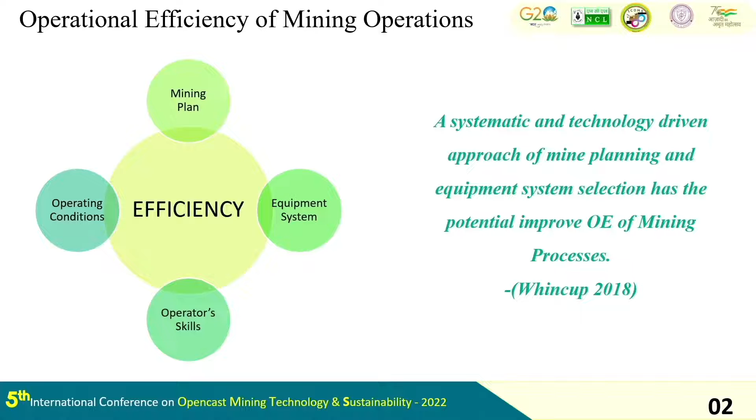So, brief introduction of the dragline mining system. Dragline mining system is also known as high bench mining because dragline operates on high thickness, like 30 meters and above, so it's known as high bench mining. And there are certain advantages because you eliminate a number of benches, your slope becomes steeper, and if your slope becomes steeper, that running slope will lead you to a lesser running stripping ratio.

Because it's coming like this slope and this slope - if you are moving this slope, you are moving more to get the same ton of coal. So, okay, and as I said, it is one of the most efficient mining systems.

Main reason is that it completely eliminates trucks. The fleet size is smaller. Production cost - CMD sir was saying - is one of the cheapest ways of moving material. Bigger capacity, minimum size is 24 cubic meters, which is also the smallest size in dragline. And high reliability, very robust machine - if the machine is okay, it hardly goes into breakdown, it just keeps running. Therefore, draglines have emerged as a dominant overburden stripping system across the globe.

So, as I said, cast blasting is integral to dragline operations. And it's not a normal cast blasting where you maximize the cast. It is a cast that we want to achieve to have maximum overall system productivity, which includes dragline excavation, dozer push, and also the cast blast profile. So profile becomes very important in this. Profile plays two important roles because it also fixes the dragline sitting position.

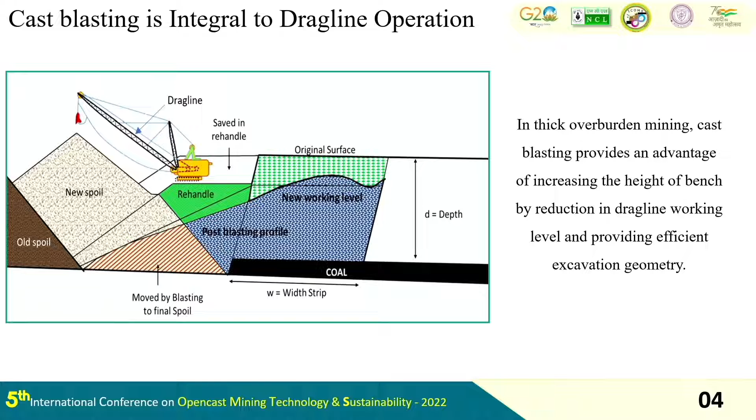Next slide, please. Next, please. So this is a case study that we did along with the Reliance team, and I'm very thankful to my co-author, Umesh Kumar Mato. He was the project director there, and also two MTech students who were doing projects at IIT ISM, Sukesh and Sai Ram Teja. Both are now working in Mahanadi Coalfield, and they were part of this whole exercise.

So just to explain, to begin with, this is the geo-mining condition of the Reliance coal. At the top you can see the dragline interburden between Turra and Purewa. That dragline was deployed, and the cover there was 60 meters thick, and the dragline size was 6120. The decision Reliance was operating on was that they were blasting a 50 meter bench at a time, and 10 meters they were pre-stripping by shovel dumper.

So on the left hand side, this is the photo, and in the middle it explains the digging sequence, the different positions the dragline takes while taking the key cut as well as the box cut to expose the coal. And the last one is just the diagrammatic representation of the dragline mining method, showing which material it takes from where, and how it extends the bench and uncovers the coal.

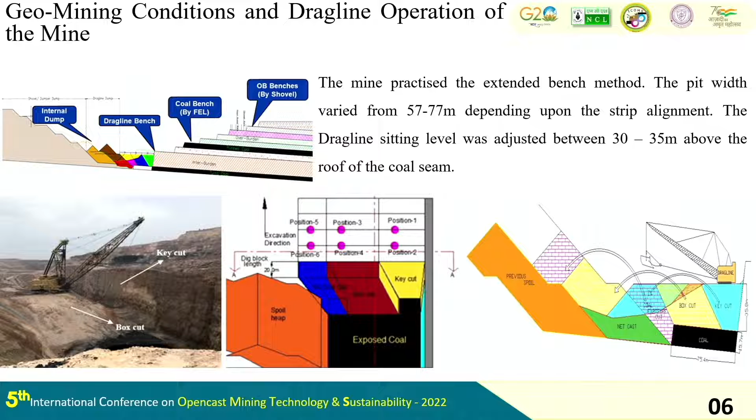Since the topic is different, I'm not going to dwell much on the dragline mining method per se, but we'll discuss more on the cast blasting. Initially we went through a number of blasts, almost around 20 to 30 blasts we studied, and these were the summary of the parameters.

If we look at the type of explosive, it was doped emulsion with 75 to 80% emulsion and 20 to 25% ANFO, and all these explosives were manufactured by themselves in their own plants. The specific gravity was 1.1 to 1.3, and the velocity of detonation was 4800.

The specific charge was varying across the 20 to 30 blasts, from 0.66 to 0.69. Burden was by and large fixed, uniform at 10 meters. Spacing to burden ratio was varying between 1.2, 1.25 to 1.35. Angle of drills, all were vertical drill holes, but these are some of the parameters which affect the performance of cast blast.

So I'm just trying to enumerate. Top stemming norm is 0.7 to 0.8 of the burden, and that's what they were filling. Decking was 2 meters at the bottom. So these are all sort of data that we collected.

Bench height 46 to 51, bench width 55 to 80, because like in the case of Amlori, yesterday I was seeing the geological map of Amlori, it has quite a swinging strike length. Same here too, it quite swings. Where it swings very steep, you tend to have your bench width less, just to manage that swing direction, strike direction. Height to width ratio was 0.7 to 0.85.

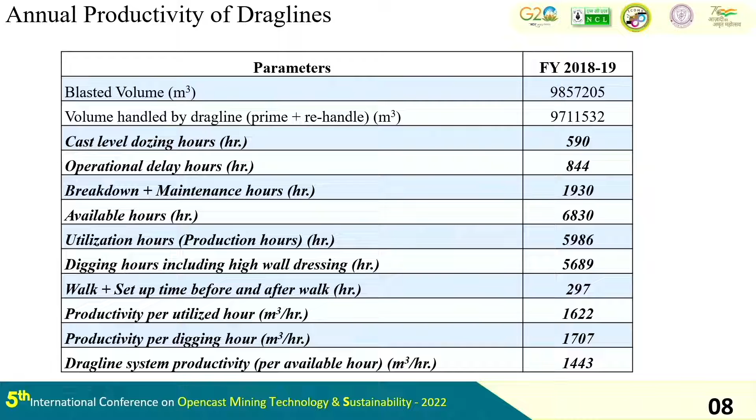Moving to the next - again the same analysis was there. The variation in cast percentage and resultant blast drop caused variation in productivity of the dragline system. When the cast percentage was very high, more than 40%, and the blast drop was in the range of 18 to 22 meters, the associated cast profile did not support efficient operation. So when the blast drop was too much, meaning the cast percentage was very high for this particular dragline, productivity was going down because the dragline was idle for many hours on account of dozing, or the dragline itself was doing unproductive work, making a pad for itself, which is unproductive work.

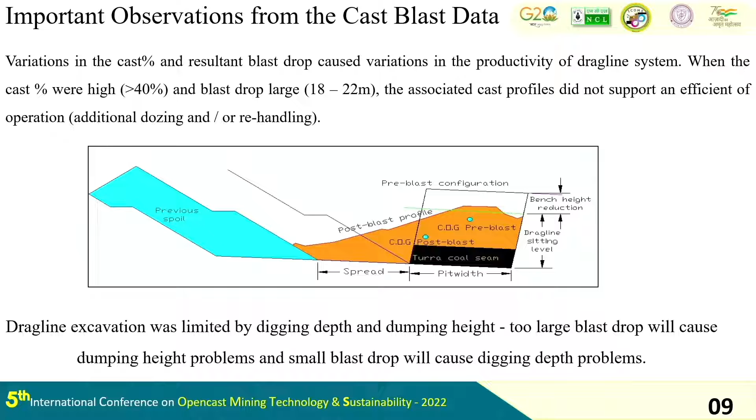So that drawing explains the blast drop and different dragline sitting levels, all that stuff. So then what we did - we used a software called DragSim to model the entire dragline operation, where we could also model the blast profile. We took a blast profile from the actual scenario and modeled that in the software. This is the sum from using the software.

While modeling we take all the parameters - geological conditions, machine parameters, production parameters like cycle time, etc. So everything we model, including the profile. Can we move to the next?

Once we modeled, then we compared. We had the actual scenario and the modeled scenario. The actual figure, for example, cast percent of that particular blast we were modeling and the dragline operation was 27.2%. The result in the simulated model came around 25.9. So there was a variation of almost close to 5%.

Likewise, rehandling was 22% in that particular operation, our model said 22.8. Productivity was 1650, our model said 1628, which is very close. We really modeled all those digging sequences and the dragline mining methods.

We also measured the average swing angle. This is a little misleading because there is nothing called the average swing angle in dragline, because every digging position is set, and in this particular case it has 6 digging positions, so every digging position has a different swing angle.

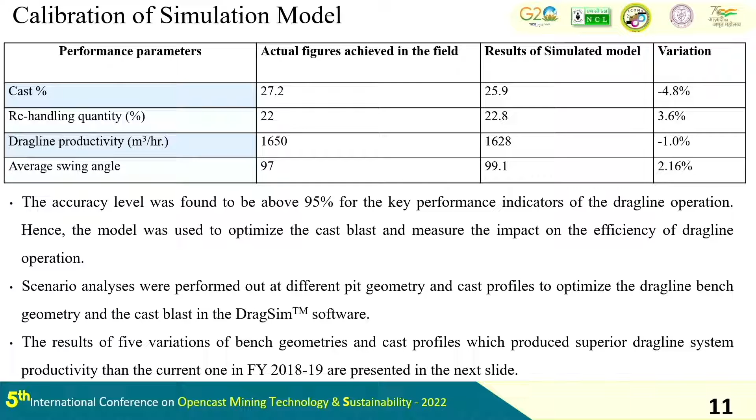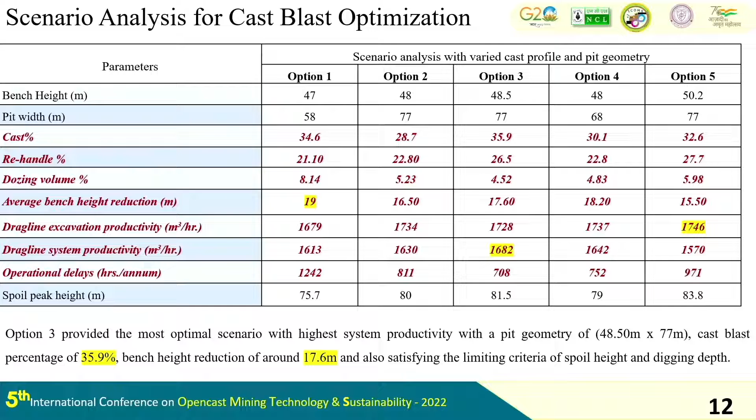While the digging productivity was not the highest, the system productivity, which included the operational delays, dozing hours, etc., during which the dragline was not able to operate or dig, was highest. So option 3, we found that in these options, that particular profile gives the maximum productivity - again, dragline excavation plus dozer plus the cast percentage.

So this is option 3. The outcome was that the optimum cast percentage we could achieve was 35.9, over which our productivity was going down, below which also productivity was going down. And the blast drop was 17.6 meters.

This, of course, is a model, not a real scenario, and mining is not a 100% business. Whatever you model, there will always be a gap. We learn from the gap, bring it back to the model, and try to refine it again, and that's how the whole process goes on, but we never achieve 100%. That's what experience says - mining has so much variation that we can never achieve 100%. Every time we try to achieve it, but there is still a gap between what we planned and what we actually achieved.

Then, with the help of the project session team, we executed that blast to achieve the blast profile, and this is the blast profile we got. This is all from the laser scanner, which we converted into an AutoCAD drawing. For the same day, we got 15.70 as the blast drop, cast percentage was 33.20, and bench height reduction was 15.70. As I said, we could not achieve what we wanted, but there was still an increment - some incremental benefit. That's what we achieved.

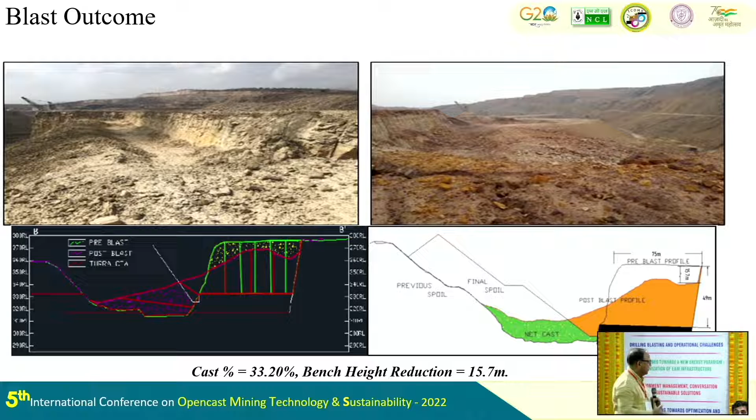We also measured the blast design. We used JK SimBlast to model the entire blast, the firing sequence, the powder factor, and the number of boreholes. We tested this for 177 milliseconds. This is the firing pattern for every 177 milliseconds - the top one is the firing pattern, and there is a powder factor which constantly decreased, while the volume was continuously increasing. That was the finding.

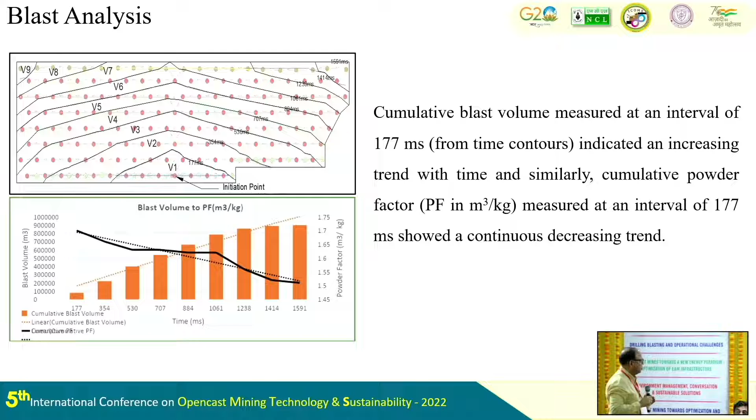So in the nutshell, we have developed a methodology, still to prove, for cast blasting. This is not for fragmentation blasting, which is practiced in most places in India - it's a typical cast blasting for dragline operations. The design objective: we need pit geometry - bench height and bench width - because cast blasting depends on the H by W ratio, L by W ratio. If height is more, gravity will support more cast, whether it's beneficial or not.

So we have to design pit geometry, cast percentage, cast profile, and finally dragline system productivity - the goal was to optimize everything. Then we undertook a simulation to achieve the desired cast percent and cast profile. Then we design the blast, for which we have 2 parameters.

One is on the left hand, an uncontrolled parameter which is site specific - rock characteristics, geology, dragline operating plan, mining method, etc., which is given. Then on the right, we have the design parameters. We can select explosive, various design parameters like burden, spacing, initiation sequence, blast hole diameter, burden stripping.

So all those where you should design, and then you test it. You run a trial blast. If you achieve the objective of maximum productivity, you go ahead and produce the report. If not, you go and change the design parameters and try to achieve that. So this is a reiterative process which has to go on until we get the desired results.

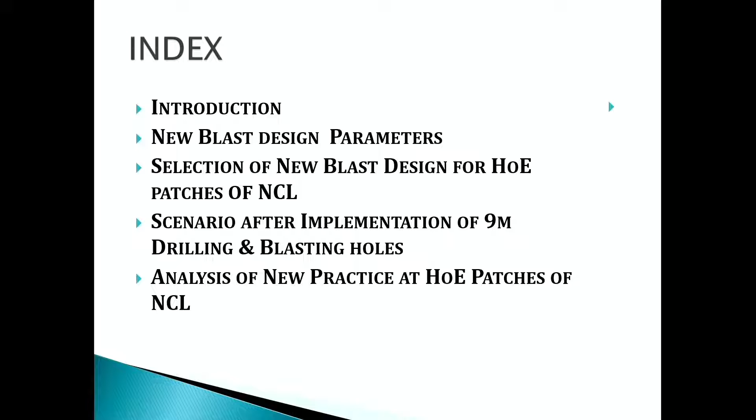Come to the first slide. This positivistic approach in drilling and blasting is basically directed by our Honorable CMD sir, and this approach is being well executed under the guidance of our GM Production, Sri L.P. Godse sir. Under this topic, what I will discuss is what blast design was being used previously in HOE patches, and what modification we have done in blast design, and what result we are getting after this change in blast design.

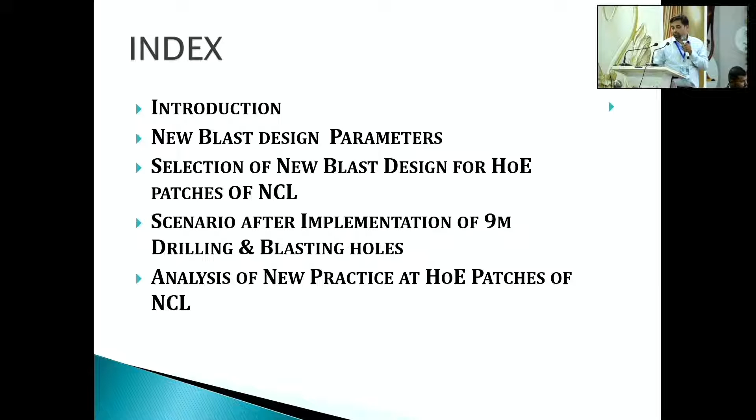First, we will discuss the prevailing practices at HOE patches. Since 2006, we are dealing with HOE, and we have 6-meter drilling, and our dia of drill in HOE patches is 159 mm, and nearly 80% of removal is being done by HOE contractors. Powder factor ranges from 1.5 to 1.9. This is all about prevailing practices.

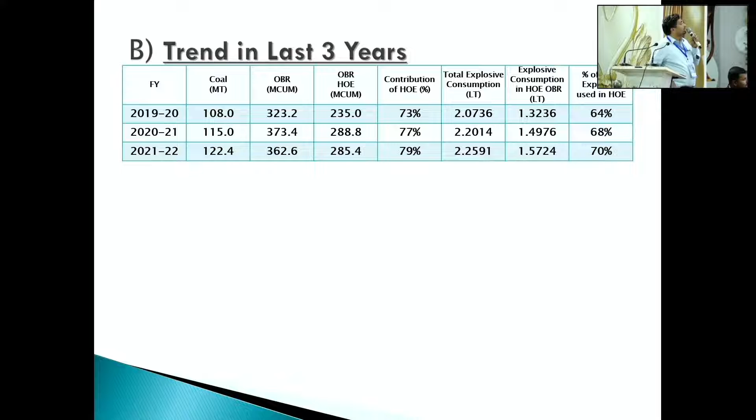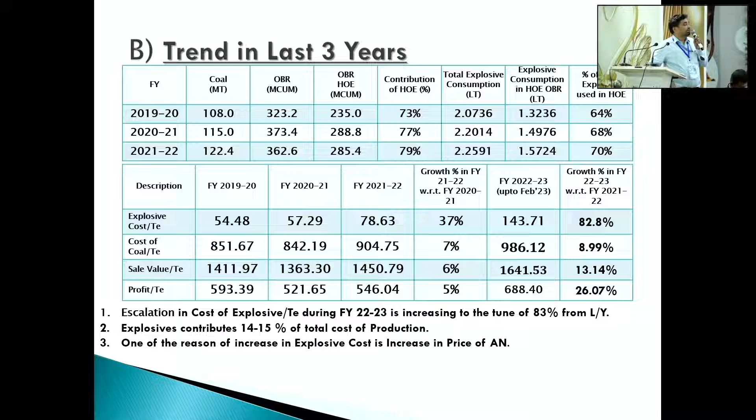Next slide, this is all about trends in the last 3 years. You can see the contribution of HOE percentage is day by day increasing. In 2019-20 it is 73%, 2020-21 is 77%, and in 21-22 it is 79%, and in 22-23 it is expected to be more than 80%. In the same way, explosive consumption in HOE is also increasing - first 64%, then 68%, then 70%. You will see the explosive cost per ton is 143 rupees per ton, and cost of coal per ton is 986.12 rupees.

So you can see how much explosive is important to us. It is nearly 14 to 15% of the total cost of coal per ton - the explosive cost. So it is very important to check and curtail where we are using explosive, in the way of blast design or in other ways.

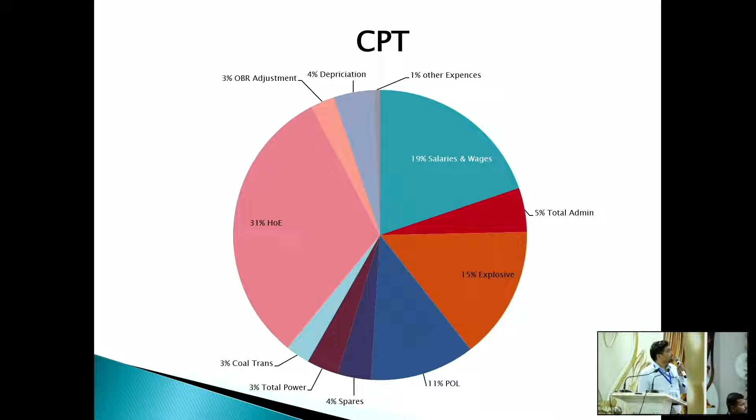So next slide, this is the cost per ton distribution of all our expenses. You can see 31% on HOE and 19% on salary and wages, and coming to the third part is 15% explosive. So explosive plays a major role in expenditure.

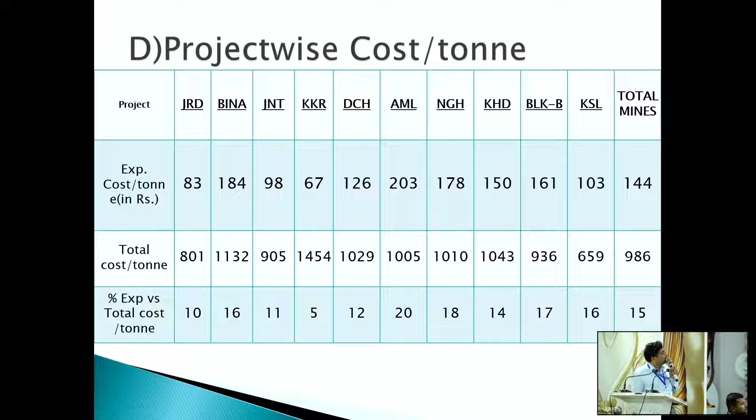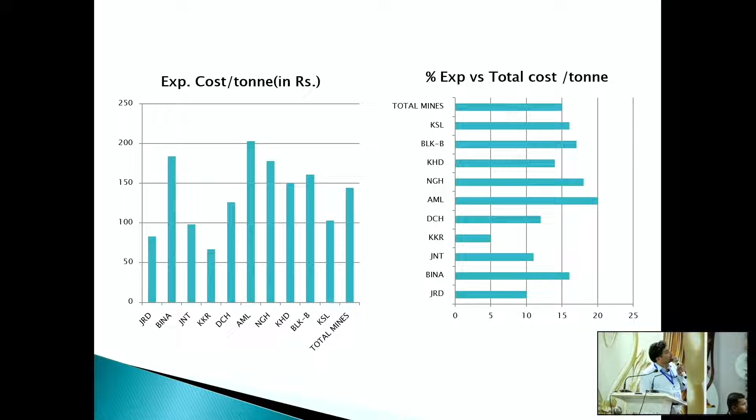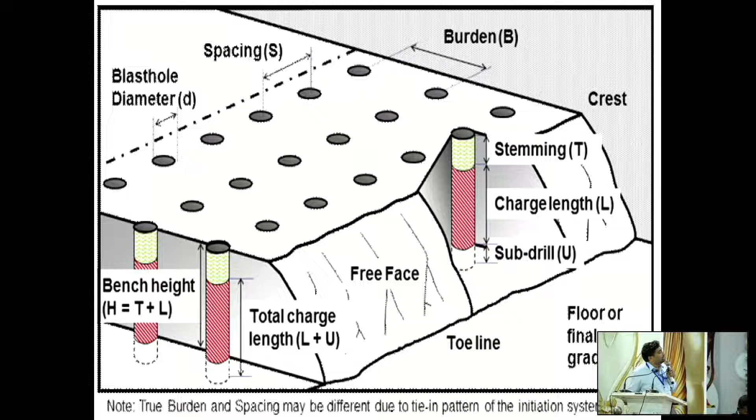Come to the next slide. This is the 3D representation of the blasting patch, where you can see spacing, burden, stemming, charge length, subgrade drill, and free face. This is all. Next slide.

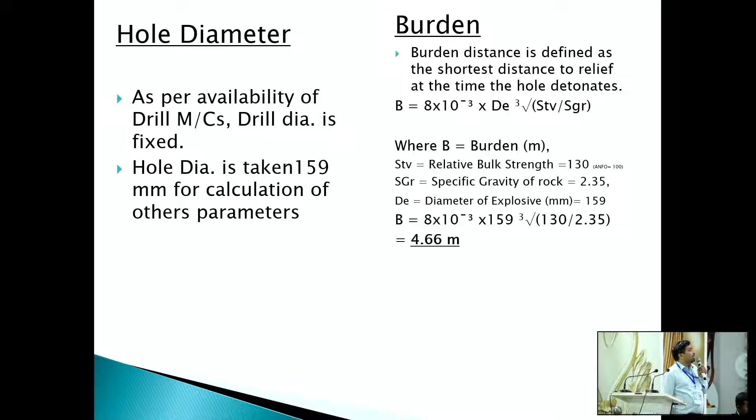Now you can see on the right side there is a burden calculation: B is equal to 8 into 10 power minus 3 into D, the cube root of STV by SGR. STV is the relative bulk strength of the SME - this is 130, and ANFO is the basic 100. SGR for NCL is 2.35, the specific gravity of rock. So burden comes to 4.66 meters.

Come to the next slide.

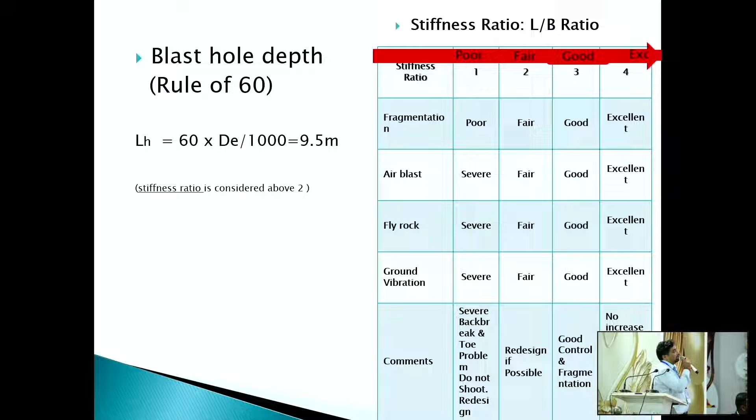This is the L by B ratio analysis. In prevailing practices, we have a stiffness ratio of 6 by 4, which is 1.5 - from very poor to fair range. In current practices, we have a stiffness ratio of near about 2, meaning the result will be better according to stiffness ratio.

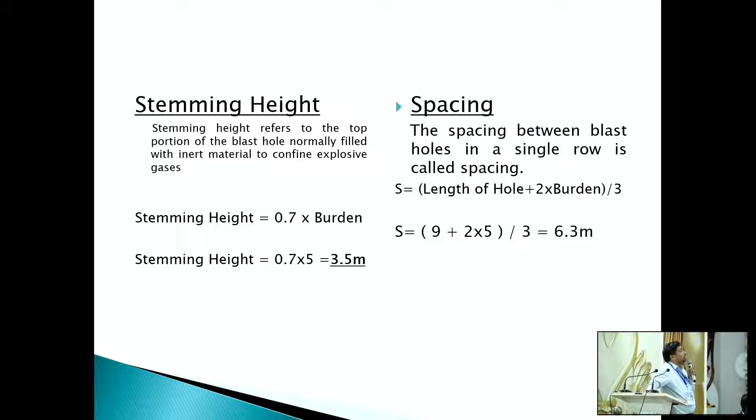Here is spacing. Spacing S equals length of hole plus 2 into burden, divided by 3. This comes to 6.3 meter. This is the whole scenario in a single slide.

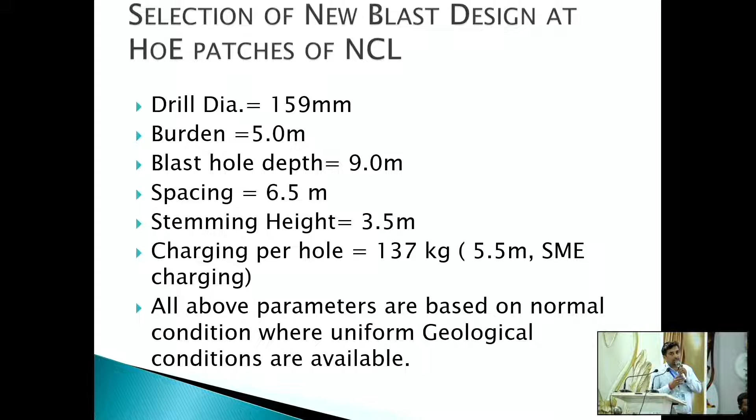Drill dia is fixed at 159, burden is 5 meter, blast hole depth is 9 meters, spacing 6.5, stemming height 3.5, and you can see charge per hole 137 with 5.5 meter charging length. All these parameters are based on uniform geological condition - you can vary it depending upon your strata condition.

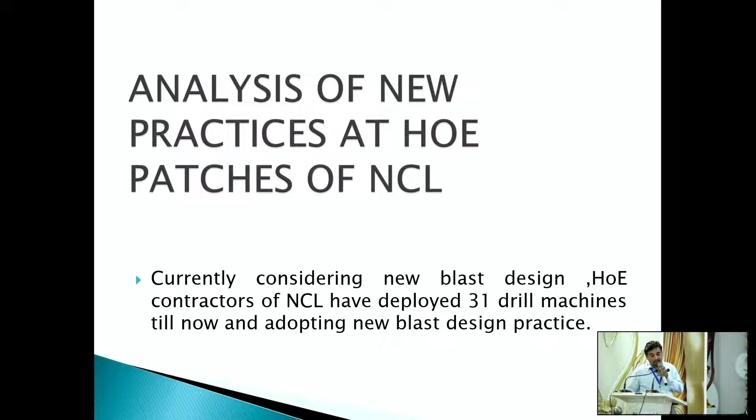Next, analysis patches of the HOE. Currently, from this guidance, we have deployed 31 drill machines, and currently we are going up to 32% drilling in 9 meter. In the next slide, we will discuss the benefit of this.

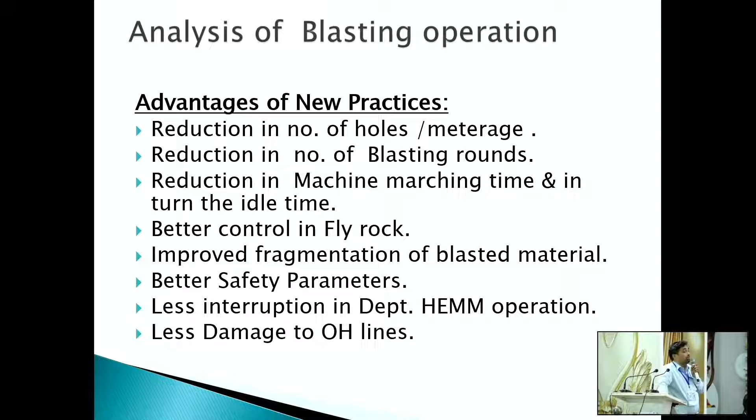This is the blasting analysis, advantages of new practices of 9 meter. First, reduction in number of holes per meterage, reduction in number of blasting rounds because of the 9 meter patch, reduction in machine marching time and idle time, better control in fly rock. You can improve fragmentation of blasted material. Safety parameters also improve, and there is less interruption in departmental HEMM working and less damage to OH line.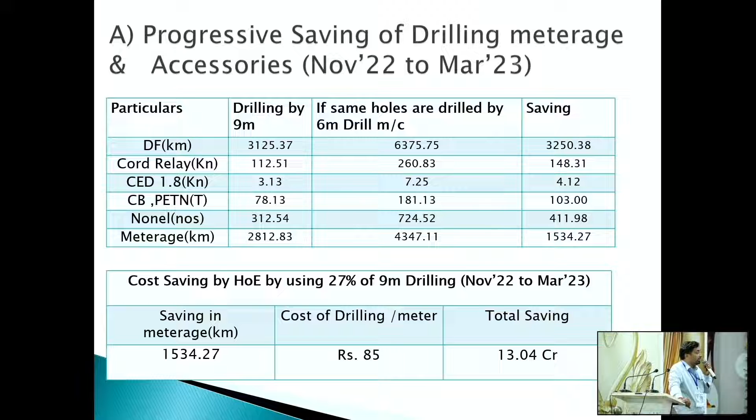The main point is meterage - meterage is totally saving of HOE contractors. It is a saving of 1534 kilometers of meterage, and if we calculate the cost at 85 rupees per meter, it will be 13.04 crore rupees of savings on HOE.

Another advantage by HOE is that productivity is increasing from October. Total NCL productivity of HOE patches is increasing from 3873 cubic meter per day per excavator to 4278 in March 23 - a total of 10% growth in productivity of HOE patches.

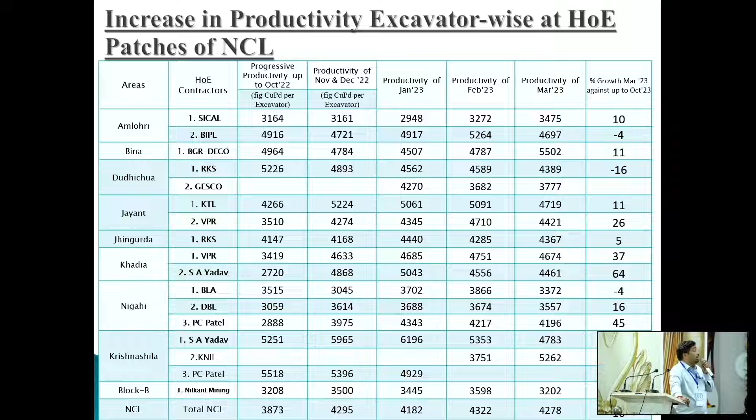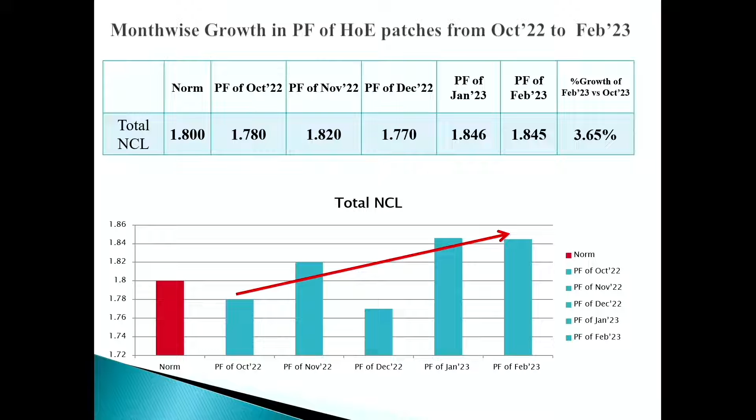This is the total NCL. Benchmark PF of NCL is 1.8, and PF of October was 1.78, which is less than benchmark, when we were not using 9-meter drilling totally. When we started using 9-meter drilling, November PF is 1.82. December, we slid down to 1.77. In January PF, we have 1.846, a growth, and 1.845, a growth in February. Total growth is 3.65%. So this is the overall growth in total NCL in HOE patches PF.

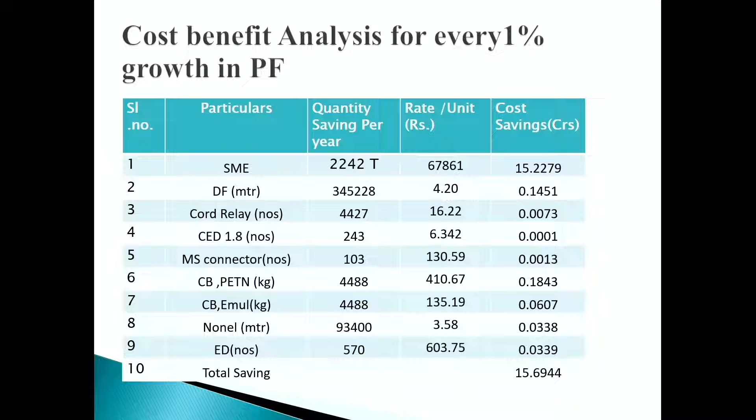Now this is cost benefit analysis for every 1% growth. You have seen 3.65% growth in NCL HOE patches. So we have SME saving of 2,242 ton annually, and in the same way DF saving, cord relay saving, and total financial saving of this adoption of 1% growth in PF is 15.69 crore rupees.

Next, come to the scope of improvement. As we can see, 3.65% growth. If we adopt this 9-meter drilling up to 100%, we can definitely achieve up to 11 to 12% growth. We presently have 31% drilling, and we are going up to 32% drilling. So we can achieve more in PF.

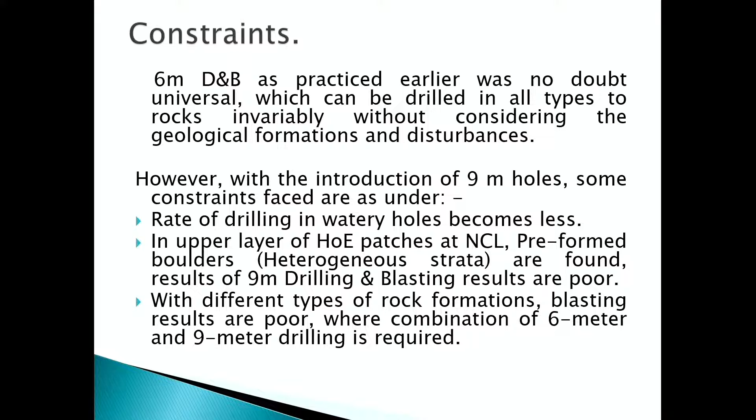Now come to the constraints. It is my last slide. Here, no doubt, 6-meter is versatile, because if you have a preformed boulderage strata, you can go for 6-meter drilling blasting. Definitely, where there are watery holes, 6-meter is more preferable than 9-meter, because the rate of drilling in 9-meter becomes less in watery holes. And in the upper layer of HOE patches, particularly in Dudhichua and Khadia, we had seen heterogeneous strata, where 9-meter drilling results are very poor. With different types of rock formation, blasting results are definitely better for 6-meter. So for decking, we can go with 9-meter with decking, but in HOE patches, there are large patches where decking is not preferable, so we can go for a composition of 6-meter and 9-meter drilling in HOE patches. Thank you, that's all.

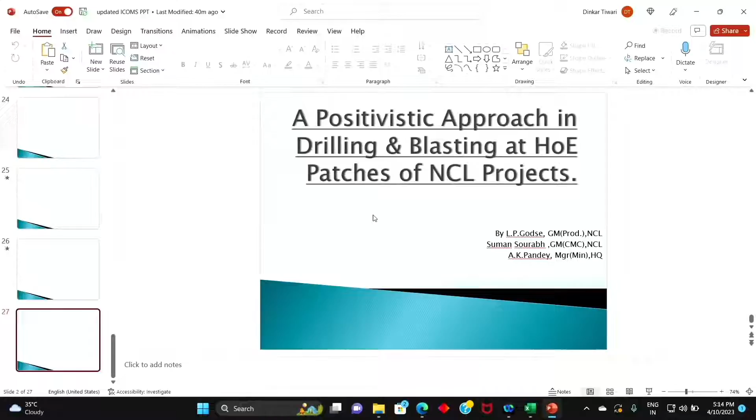Thank you, Mr. Pandey. Good presentation for the HOE contractors. Thank you, sir. Thank you.

We quickly move on to the third paper from Sasan Power. It is mitigation of coal bench fire via introduction of pre-split control blasting. Sanjay Sengar, Abhilash Nanda, Ashish Kant, and Aditya Kumar Verma are the authors.

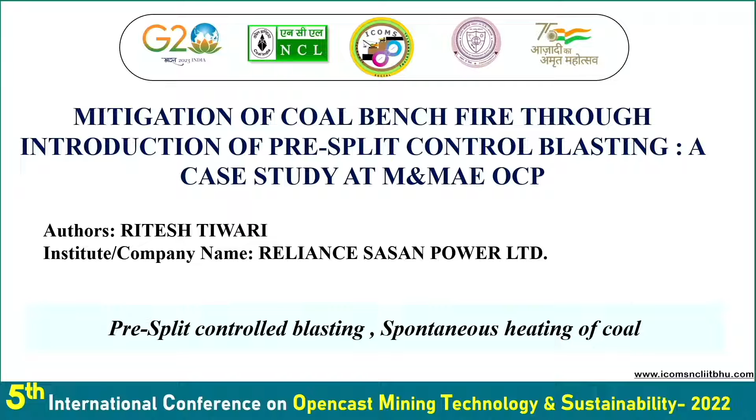Kindly introduce yourself. Good evening, everyone. I am Ritesh Tiwari from Sasan Power Limited, present here for sharing our case study on how we mitigated a coal bench fire using pre-split blasting.

Sir, for the larger open cast mines having a stripping ratio of 1:4, like SASAN, as we are dedicated to feeding our power plant with 55,000 to 60,000 tons per day, it is our utmost priority to have exposed coal seam remain for 45 to 60 days. With this exposure, coal bench fire due to spontaneous heating is our major issue that we have to tackle day to day, which decreases our overall mine economics.

So we developed this technique of pre-split blasting in coal for mitigating this fire issue in our coal benches.

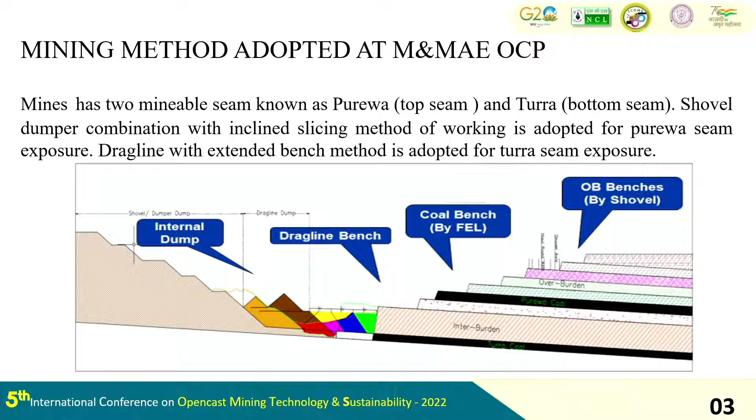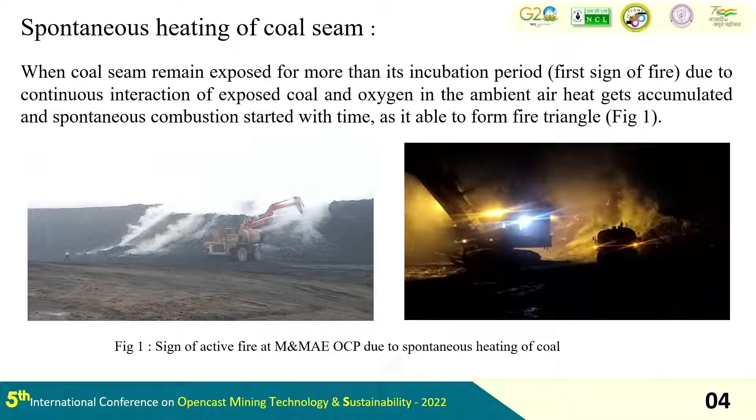Next, so what made us develop this technique? Sir, as our mine is spread over a strike length of 4 kilometers, our whole mine operation is divided into two zones, which we call north pit and south pit. When coal winning goes on in north pit, the south pit undergoes development work like dragline cut progress, decapping, electrical layout, water management, and so on.

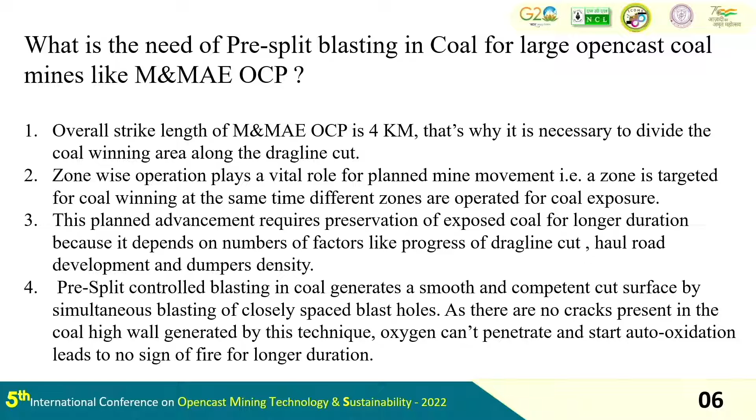So when we go to the next pit at the time of coal winning, we see that our exposed coal seam has caught fire, which makes it very difficult for us to continue uninterrupted production in the Purewa seam. This ultimately made us lose coal, because we are not able to trace that fire. Initially, at the time of face profiling, it is very difficult to dose that heated and fiery coal seam. After deploying diesel drill or electrical drill with cable layout, and after blasting with SME and DF, it becomes a totally unsafe working place for deploying our equipment and manpower at risk.

So ultimately this fire degrades our coal quality, makes unsafe working conditions, and also decreases our machine productivity.

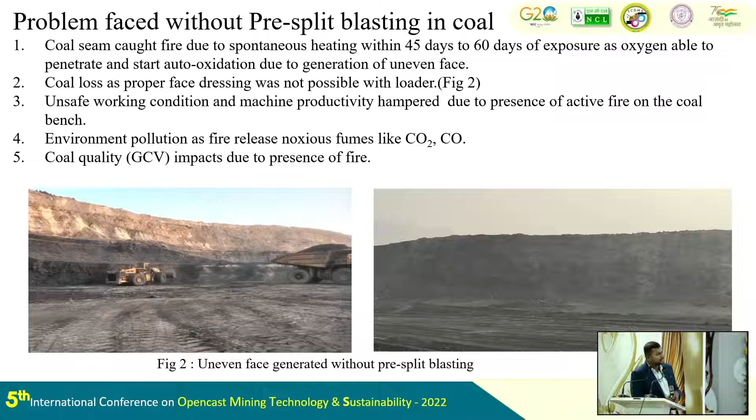So sir, this is the mechanism we developed, and we have similarly replicated our dragline bench pre-split blasting with pre-split blasting in coal with a lesser diameter.

Next. Sir, here we can see in the first picture all the holes after getting a cut line. After a linear cut line of coal winning, we deploy a drill of 159mm, and all the coordinates are plotted with the help of Minex and a dedicated survey team using DGPS. Then, seeing the parallelism with the help of IDM 30 Atlas Copco, all the drill holes are made in one line.

In the second picture we can see how we have made on-site cartridges, SME cartridges, for charging of the hole. In this lower picture we can see holes where both adjacent holes are tied with the help of DF, and at the top of the hole, all holes are covered with SME, with sand bag, with coal cuttings. At last, our result is all the holes are shot instantaneously, and we have generated a linear crack.

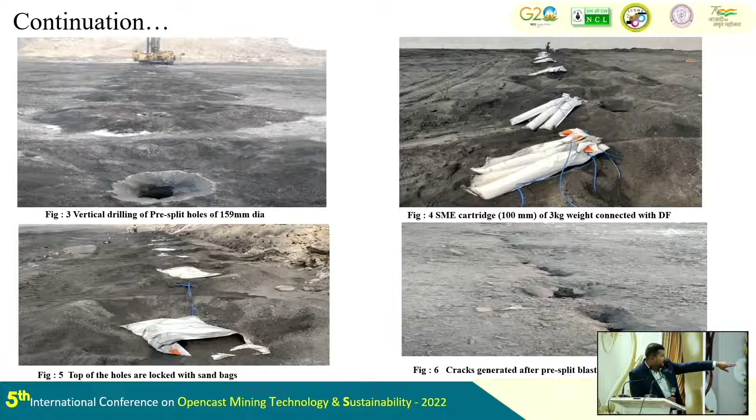Next. So this was our development of pre-split charging, a hit and trial case over the last 3 to 4 years, and last year we established this technique. We improved our technique from 18 meters, to 19 meters, and at last 20 meters. There, all the parameters are written.

In North Purewa coal, with a depth of 16 to 18 meters, we did not receive a good result on our high wall. Then we did the same in Mid Purewa coal with 18 to 19 meters, and we took the spacing of 2.75, with 5 bags in each pre-split hole, and got a respectively good result compared to North Purewa.

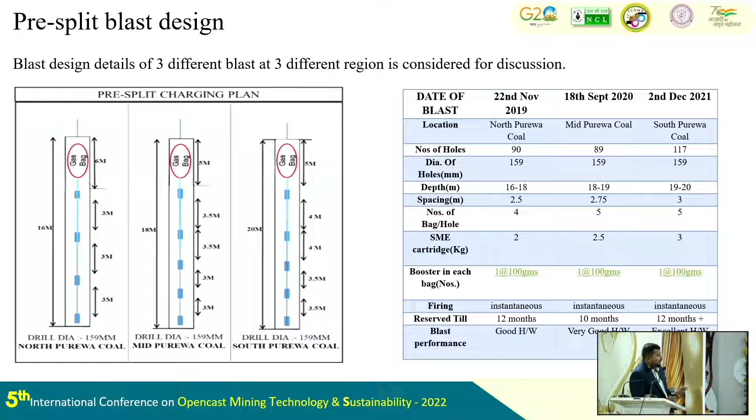And at last at South Purewa, when dealing with South Purewa coal of thickness 19 to 20 meters, by keeping the spacing 3 to 3.5 and 5 bags in each hole, we received and gained a good result. I can even say it was an excellent result, and we preserved that coal for more than a year. It is still an unfired coal seam, and we are taking that coal seam after 1 year.

Next, and in conclusion, I can say we have got higher productivity with a stable high wall, and good confidence working at the time of winning coal under a 20 meter high wall, winning with a combination of FEL and dumper. So from this session, I recommend this technique for all mining professionals to deal with fire. Thank you.

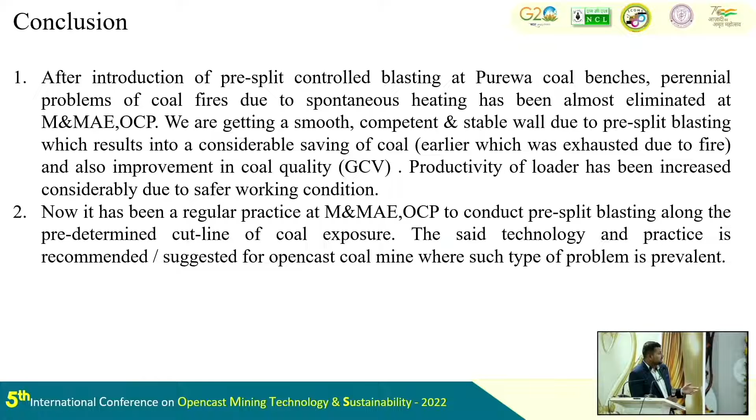Okay, thank you for finishing within the time. Moving on to the second last presenter here, Mr. Navin Rai from NCL, on good blasting, good fragmentation, and fundamental problems. Navin. Thank you, sir.

Slides, please. I'm Navin Rai, Chief Manager of Mining at CMC. But this presentation and article I have submitted is more based on my experience as blasting manager at Khadia project. In this presentation, I am trying to focus on two things. First is drilling. Please go to the first slide. First, I will be focusing on the importance of drilling.

Because drilling is the most neglected portion in blasting. Barring dragline benches, where drilling takes paramount importance, and the least important is in HOE patches, where you are blasting more than 700 to 1,000 holes per day. Next slide, yeah. So before any process begins, surveying the location, meaning from where your blasting patch is going to happen.

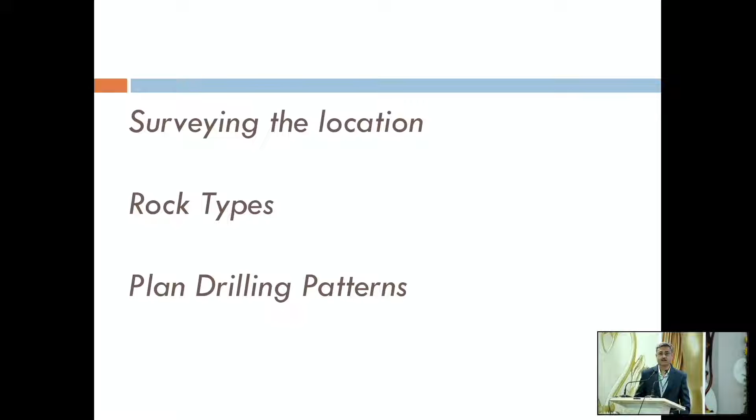You plan your drilling patterns. I can tell you by my experience of 3 years, it rarely happens in outsourcing patches. Outsourcing patches are left to themselves, they simply keep on putting their holes on the decided pattern of, say, 4 by 6. But on the day of blasting, we don't know which is our burden, what is our spacing, unless it's pre-decided where our first hole is going to blast, then the second, then the third, then the fourth row, not the holes, where it's going to move. Because there is a basic empirical relation between B and S, burden and spacing. Burden is always less and spacing is always more. And if the process of your blasting gets changed, your fragmentation is badly affected.

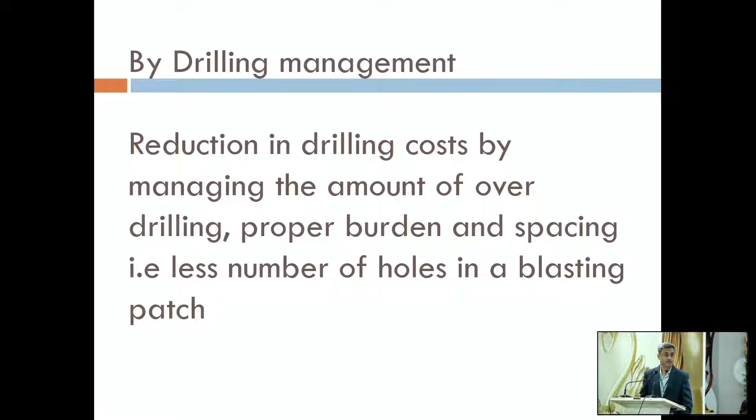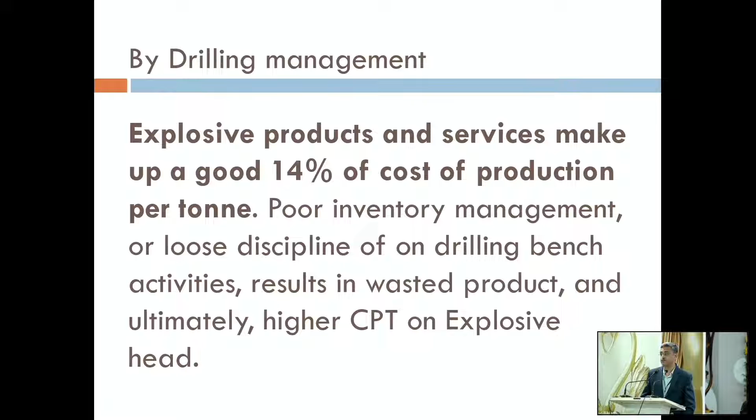Just to highlight what the cost of blasting costs us nowadays, it's 14% of the total cost of production. So any waste, any improper utilization, poor discipline will result in higher cost of production.

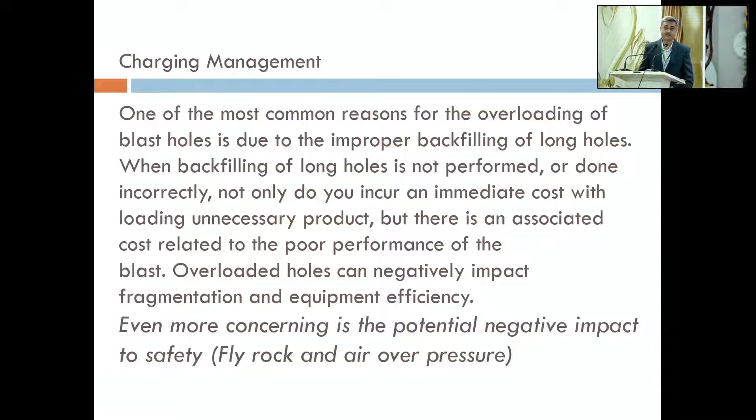Downstream impacts from blasting activities are very difficult to quantify, but analysis of every blast can be done.

Nowadays, with the deployment of 20 cubic meter shovels, if we are blasting something like 50 meters of advance, you can see the difference in productivity, measured in terms of meters that it has moved per day. If you have a good blasting, the advancement, the productivity of your shovel will increase quite dramatically.

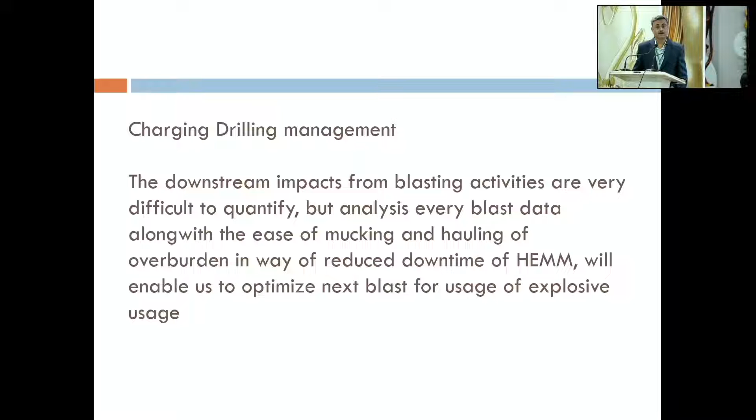In Khadia project, we have seen it vary from 10,000 production per day to 15,000. If you had a good blasted material, your shovel could produce more than 15,000 cubic meters in a day.

Now, as to cost cutting measures, I am showing you the variations in the normative powder factor. I have taken just 5 major projects of NCL, which consume most of the explosives. You can see Jayant is on the upper side of the norm, that is 2.18, but we have projects like Nigahi and Amlohri, which are struggling at 1.55 to 1.57.

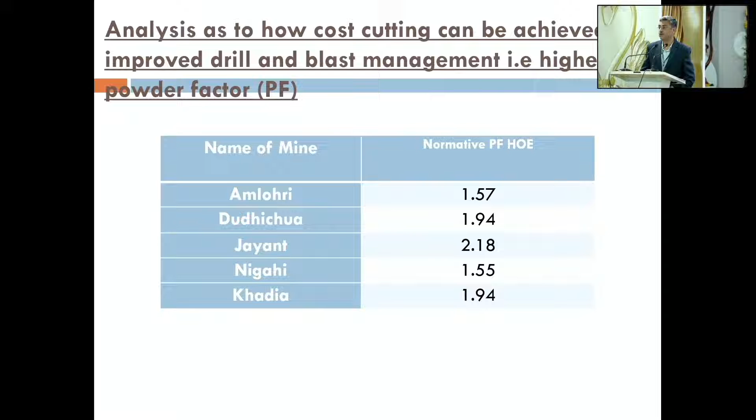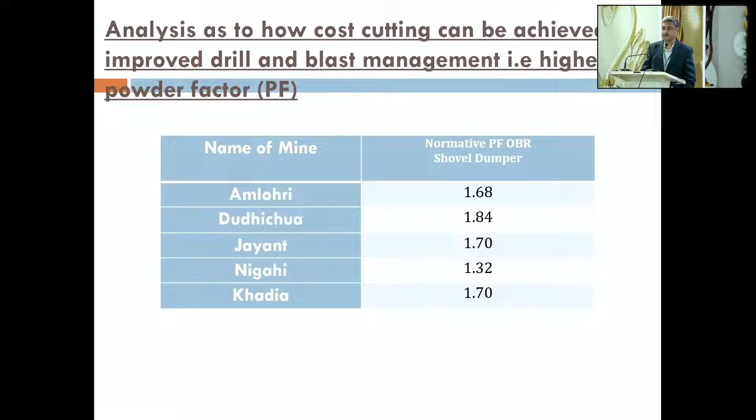This is also of coal. Shovel dumper also, you can see that it's 1.32 to 1.84. This is the level of variation that you are getting in the same set of drilling and blasting pattern. Geology is obviously changing, but 1.32 and 1.84 I don't think is comparable.

Now, in this part of my presentation, I am trying to focus on how cost saving can be done by achieving a PF of 2. The earlier presentation by Mr. Pandey had spelled out that the target set by CMD sir is that of 2. But how will we achieve that, and by achieving it in theory, what is the cost that we are going to save? So these are just statistics.

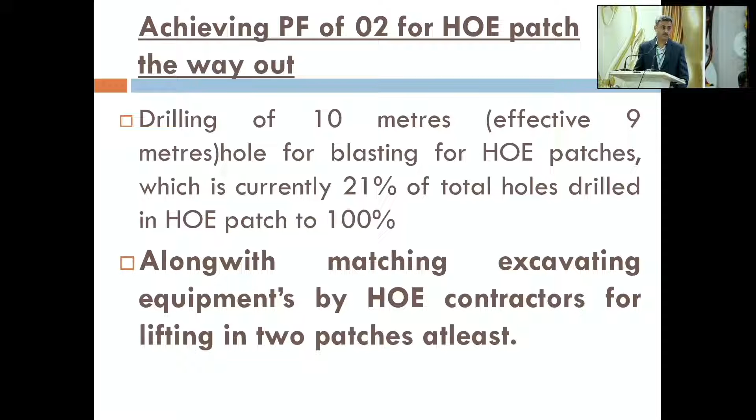Here the second point is important. Matching excavating equipment by HOE contractors is a must, meaning it should be able to lift in 2 patches. If you are drilling and blasting a 9-meter hole, effectively we will be getting around 8.1 or 8.2 meters of blasted material, so in 2 lifts we should be able to lift it. The logic behind this is that currently... okay, I will be concluding.

Larger blasting patches so that you are not blasting daily and you are able to set the patterns according to your requirement.

Now this is quite important. You have to fix the burden and spacing of the blast hole, meaning the length and breadth of the patch is very important. Right now you will be seeing it's in circular or arc form. They will be drilling anywhere depending upon the number of PCs or shovels that they are deploying. They have no length and breadth. Without length and breadth, you cannot design how you will open the first hole, first row, second row, third row, where the whole material will be moving. So this is quite important.

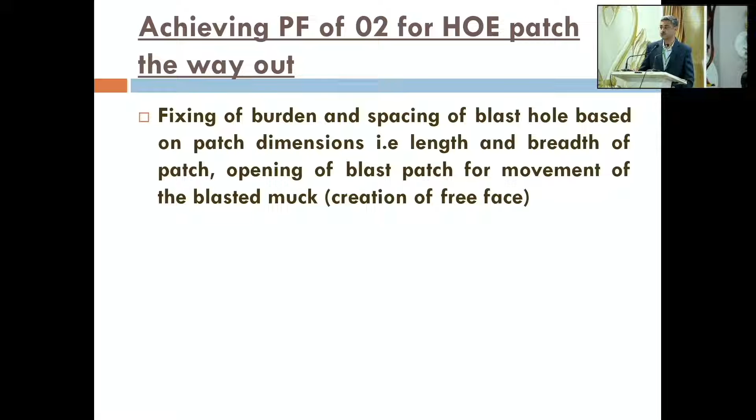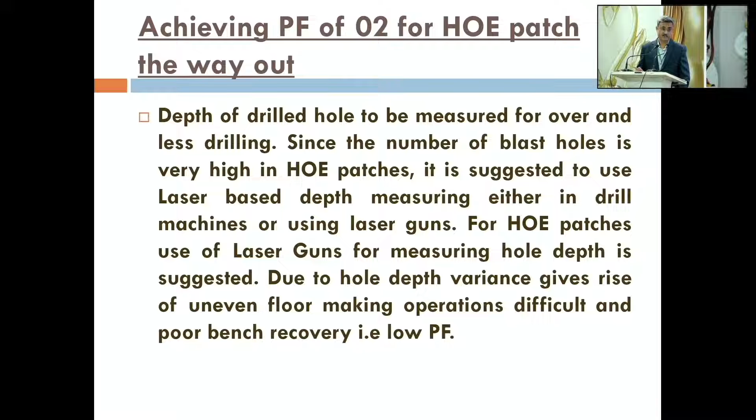This is one point that I have practically found: some holes are deeper, some holes are shorter. If you are charging 800 holes per day, you are unable to monitor this, and you will have complaints from both sides. If you achieve a poor PF, your contractors and suppliers will complain, and your HOE will be talking about poor productivity on account of uneven floor that they get. So shorter holes, longer holes, the variation matters.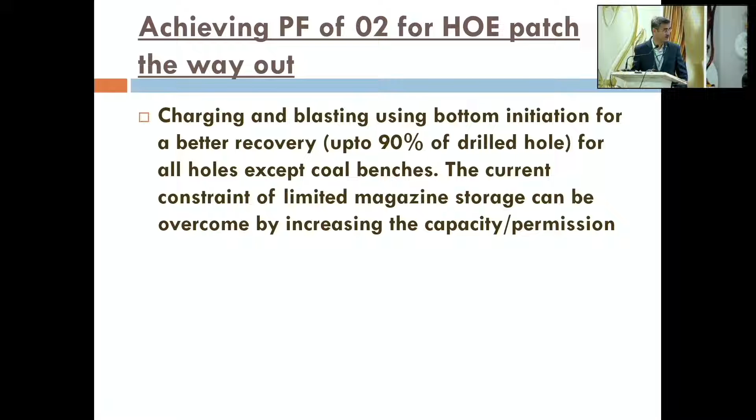Now, this is just a pure calculation that if we achieve a PF of 2 in just HOE patches in just 5 projects of NCL, we can save up to 91 crores. Cost of accessories and cost of drilling has not been included in this study. So to conclude, if we are able to improve our shovel benches and calculate for all the accessories, I think it will be well more than 100 crores. Thank you, sir.

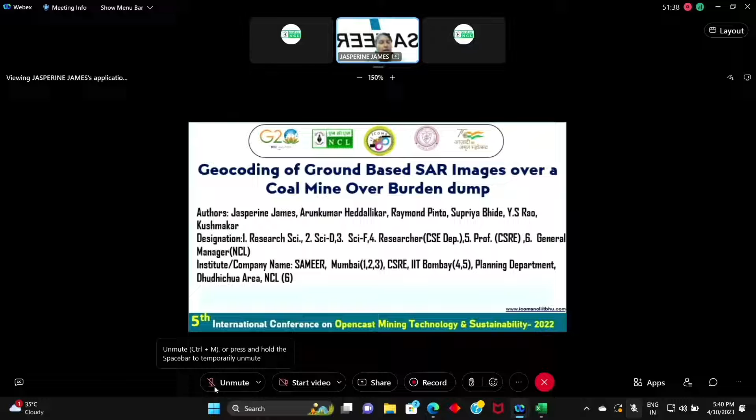Very good afternoon to one and all present here. This is my presentation, geocoding of ground-based SAR images over a coal mine overburden dump. So actually we have to map it, that is our criteria. I will just go through the statement. Basically, the images that are obtained are in 2D domain.

2D domain in the sense X and Y. When we actually map it into the 3D space, we need to convert it into a 3D domain. So this is the particular problem: converting the 2D image into a 3D plane for mapping it into Google Earth. To do this task, we can't do it directly. We need to apply some model or algorithm that will actually place the 2D domain image into the 3D domain.

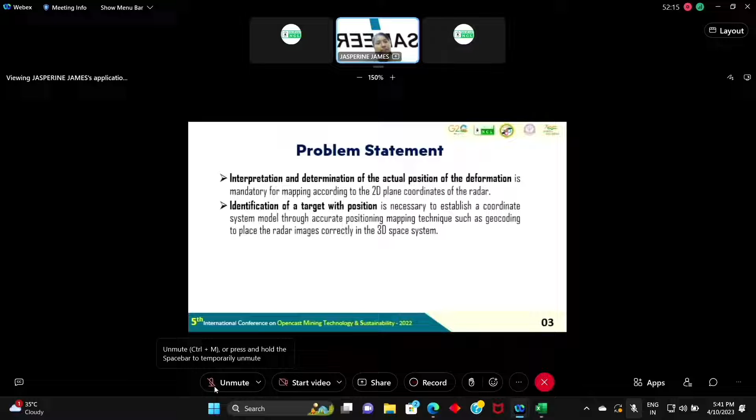So our main objective is basically to convert the entire data that is in 2D domain into the 3D domain, and identify the GCP points of strong reflectors such as CR, and then place them in the particular position. We are also doing this at 3 different angles, that is, finding out the positions at 0 degree, -5 degree and -10 degree, and mapping it into the particular region.

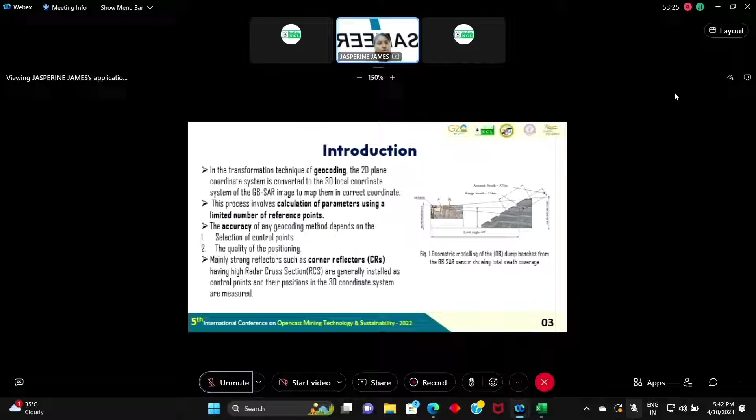So why basically geocoding, and why is it required? Firstly, we need to calculate the particular region and then map it into the particular parts. This is only possible if we have two different points, that is lat-long point 1 and lat-long point 2. So we are using 2 different points: one is the GBSAR point, in which the lat-long position of the GBSAR is considered, and then the CR position is considered. So calculation of parameters is required. Secondly, accuracy.

For considering the accuracy, we have 2 different points: selection of control points and the quality of positioning. So we are using 2 different things, that is the corner reflector...

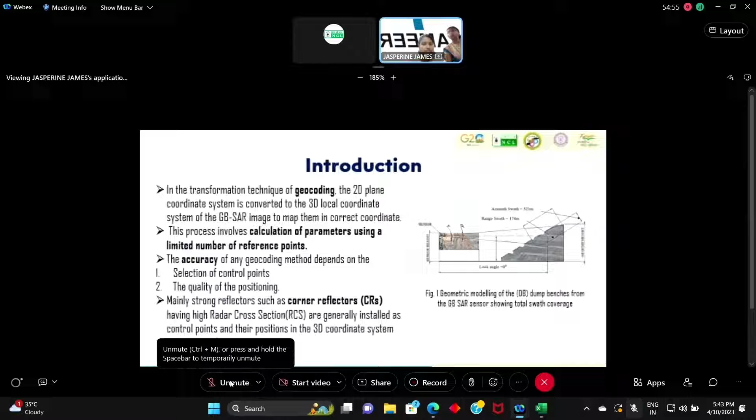So this is my presentation. Is the slide visible, first slide. Basically this is a presentation on geocoding of ground-based SAR images over the overburden dump. Basically the problem is that the images are in 2D domain, which I have to convert into the 3D domain. This task can be achieved via some 2D to 3D conversion models, that is a transformation model, you can say. So to convert this, we need some models to be applied, which I'll be explaining in the upcoming slides.

Then we have GCP points, strong reflectors, which is the GBSAR point and the point of the CR, that is the corner reflector. So we take 2 different points and then map it. We use 3 different angles also to particularly position it at 3 different times. So what is basically geocoding?

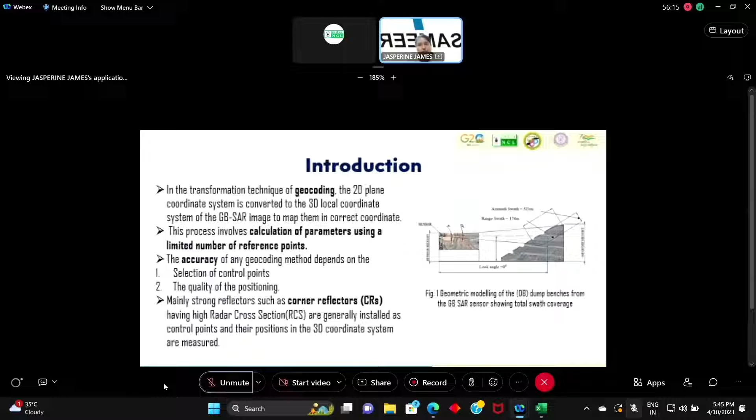Geocoding is basically calculating parameters and mapping the 2D image into the 3D domain. So whatever you see here, this is a GBSAR, which is placed and looking into a particular direction. Once you get the 2D image, if you have to place it into the 3D domain, we need to consider two parameters: selection of control points and the quality of positioning. Mainly the strong reflectors, CRs, are used for this positioning.

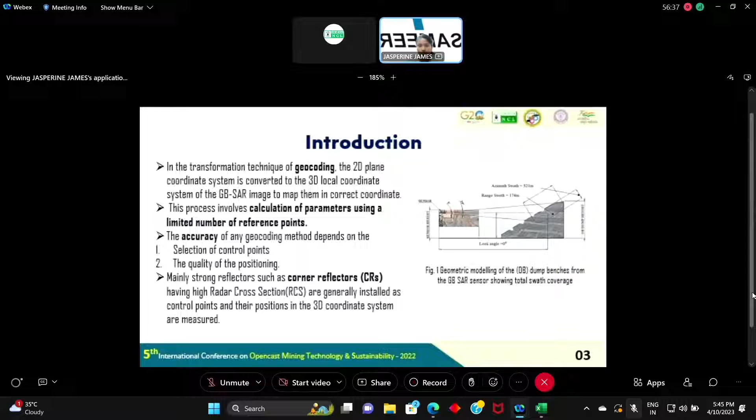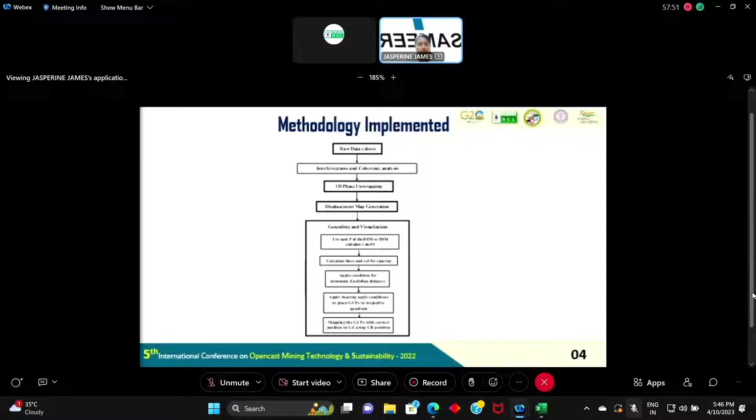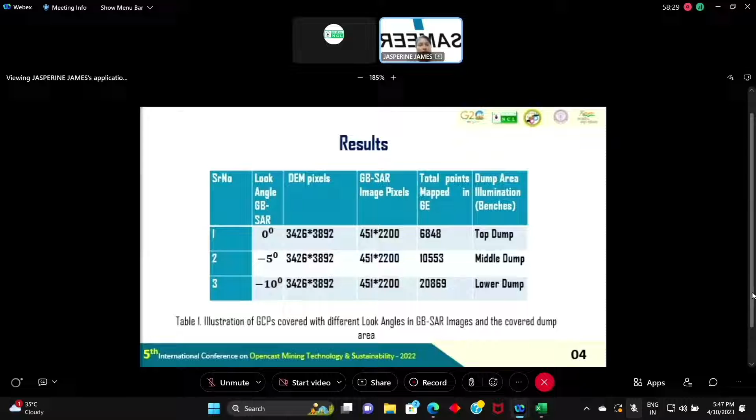So for 3 different look angles we are considering, that is 0 degree, -5 degree and -10 degree. The DEM pixels are there, and you can see three different regions, and we also found out what area each covers. Like 0 degree is covering the top dump, and the middle and lower dumps cover the other regions. So 3 different regions it covers, and I have calculated the total number of pixels in each area. So we are particularly mapping -10 degree because it gives a larger illumination of the particular dump.

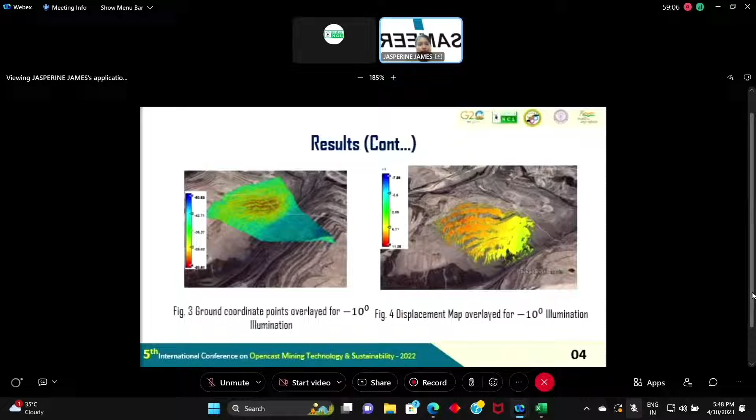So you can see this DEM model which has the 3D height information of the data. So height information plus the actual 2D data gives you proper mapping in this particular region. So these are the results. Basically, it includes mapping of the particular area, where the displacement map is plotted. You can see the red region is actually where the displacement had occurred. And finally, we proceed with the mapping.

So by concluding, I can say that we have mapped 0 degree, -5 degree and -10 degree, and results show clear mapping with all angle positions in that particular area in Google Earth. 0 degree shows the least number of points, that is the top portion. So we proceeded with -10 degree, which covers the lower area of the dump, and -5 degree covers the middle area of the dump. So mapping of the coordinate points with exact DEM coordinates along with CR, as I said, we position one CR in a particular position and then map. So two lat-long positions give you the accurate mapping position. And finally, we mapped it as shown in the results.

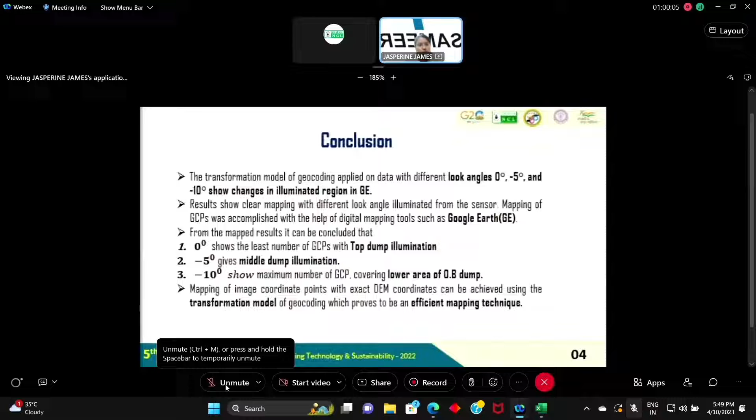So this transformation model proves to be a good, efficient mapping technique, which is shown in this slide. So this is how we have mapped. It really gives good displacement mapping in that particular region, as observed by the GB-SAR.